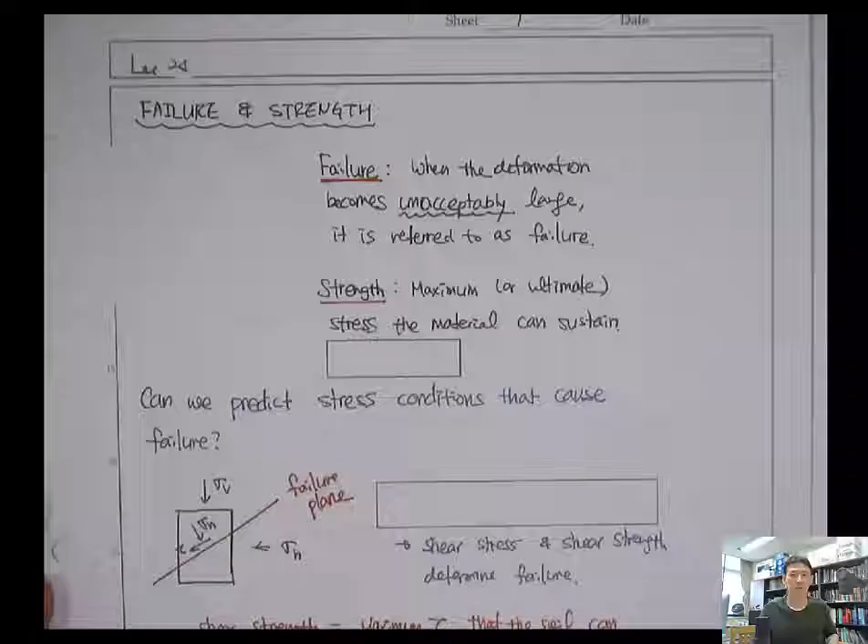So this is lecture 24. In this lecture, we're gonna talk about failure and strength, and in the later part we will talk about the stresses in the material.

So then, what is failure? What would be the failure when we consider it? Failure is a very subjective concept.

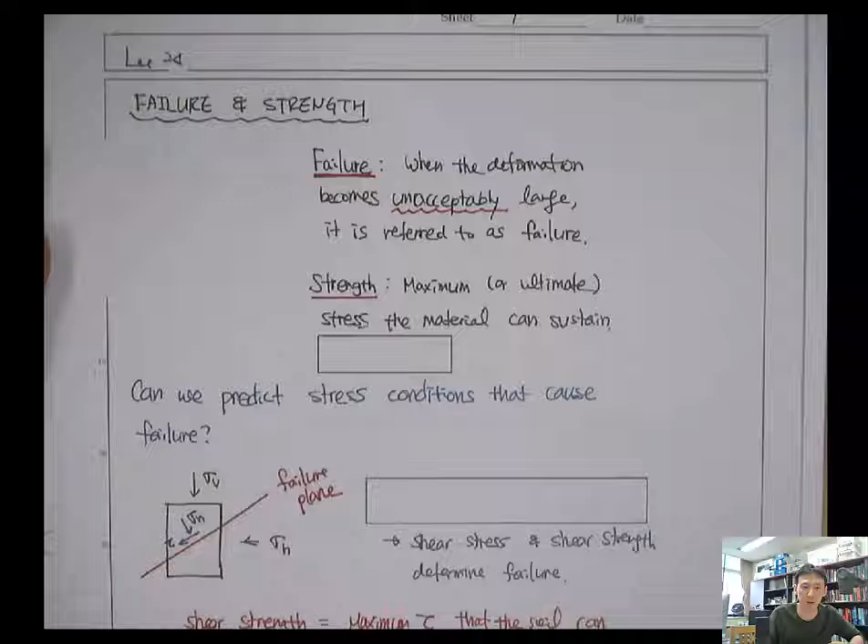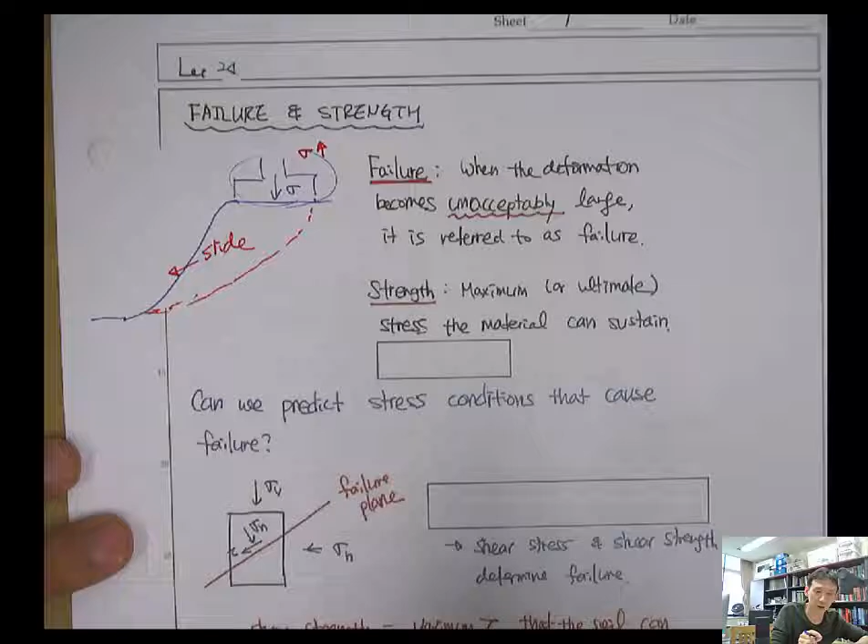Let's say that we have some kind of a slope like this, and we are building a structure with a foundation like this, and it applies the stress. As we increase the stress, it will deform a little bit by a little bit, and then eventually it's gonna slide. When the sigma is very low, the movement of this foundation will be very slow and very small. So if this structure is built in the middle of nowhere, like in a mountainous area where nobody is living, and if the slope failed, it wouldn't cause any damage to society. So then we can accept large deformation. Can we call it a failure?

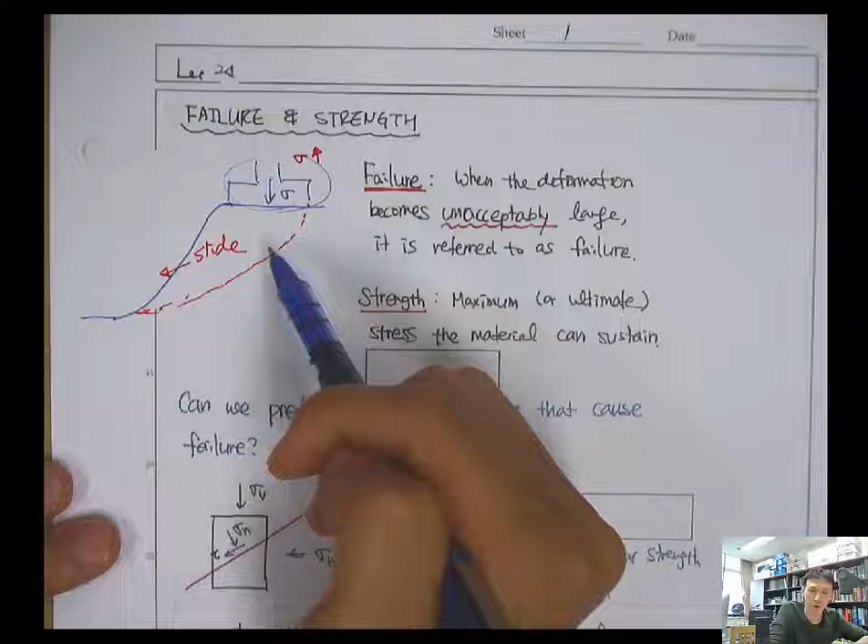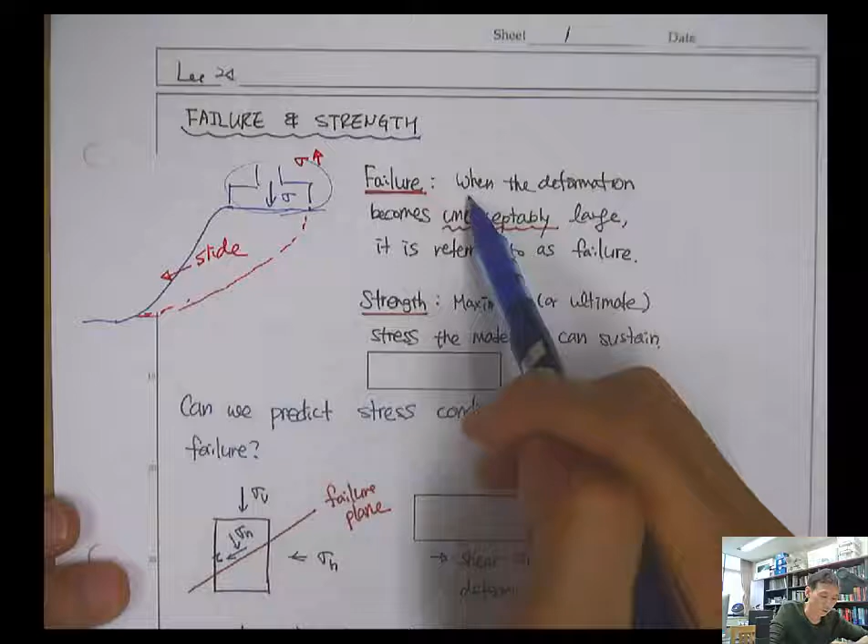But on the other hand, if this foundation supports a nuclear reactor, and if we have deformation of the soil mass or ground by maybe 0.1 millimeter, 100 micrometers, so the foundation has moved by 100 micrometers, and if it affects the functionality of the nuclear silo or reactor, then we can call it the failure. So when the deformation becomes unacceptably large, we consider it as the failure.

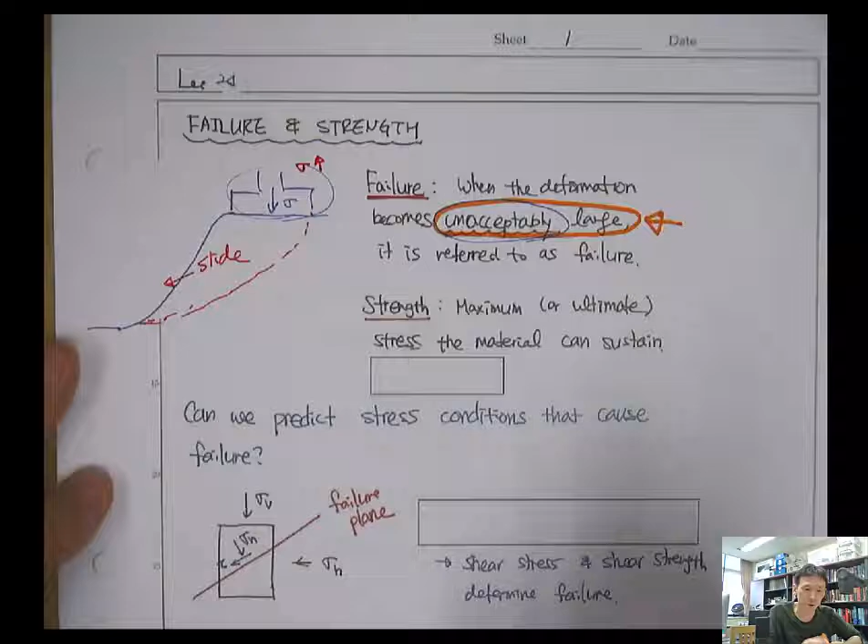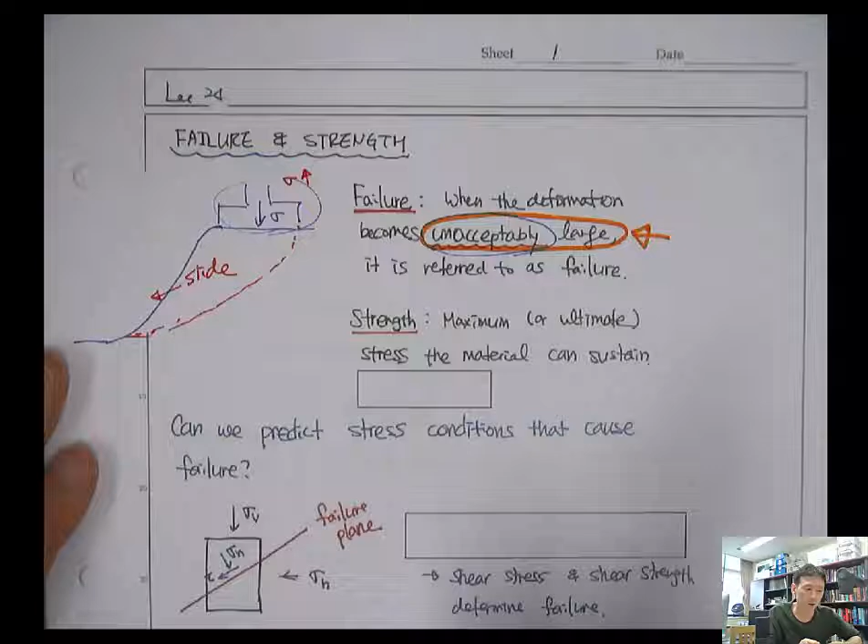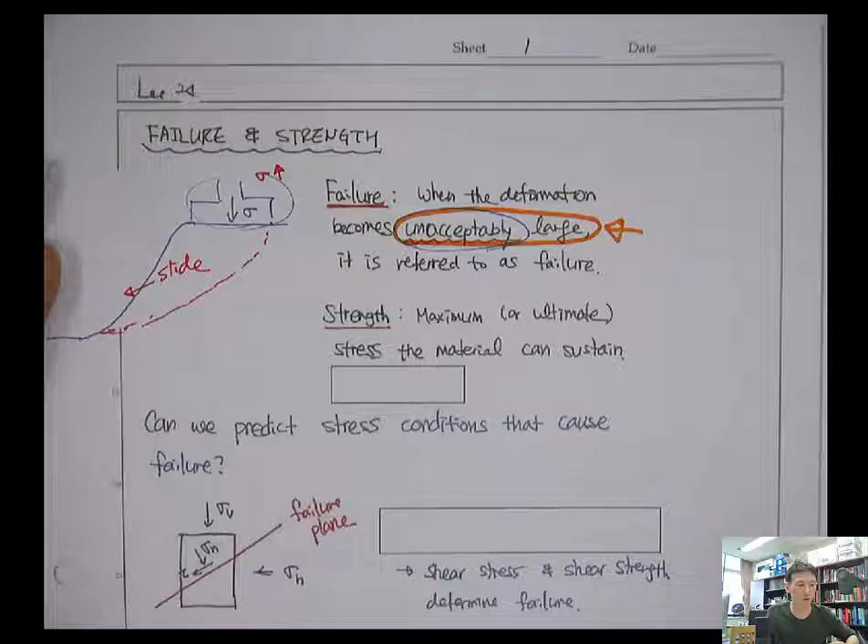This acceptance of deformation can differ from structure to structure. If it's a bridge, you may allow 10 centimeters of deformation, as long as the vehicle can still pass. If it's a very sensitive structure, like a nuclear silo or some factory machine with semiconductor fabrication, then even 1 millimeter of deformation can damage the functionality of the machine. So the allowable deformation depends on the structure type.

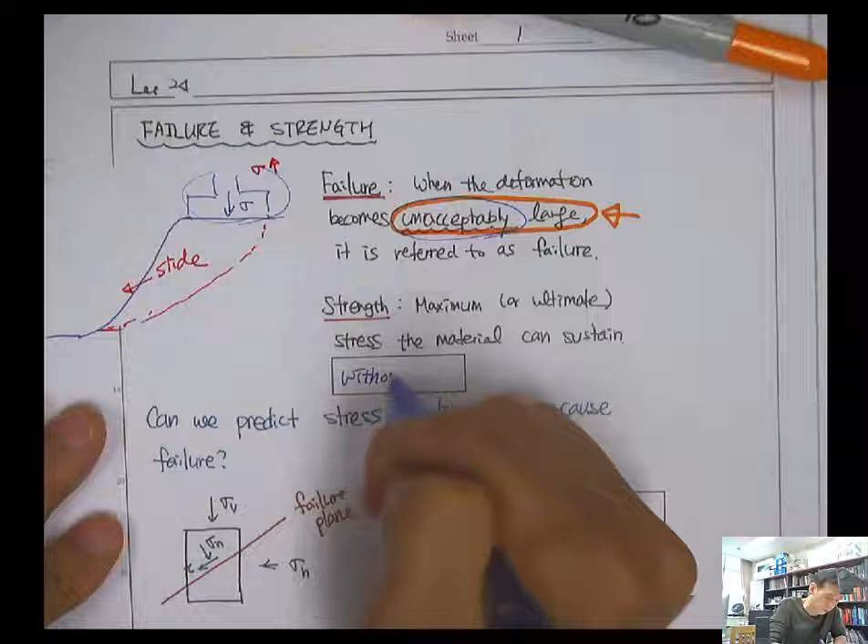So then, what is the strength? Strength is the maximum or ultimate stress that the material can sustain without failure. This is also a subjective term - if you only allow very minute deformation, then the strength can be estimated very low. If you allow large deformation, then the strength can be large.

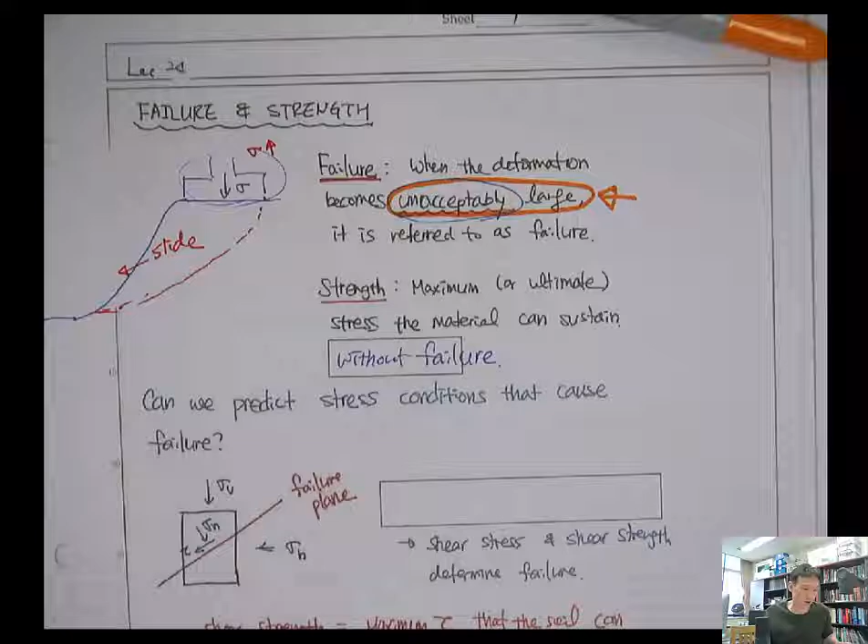If you think about rubber, what is the strength of the rubber? When it can deform maybe 1 millimeter, then the strength it can sustain will be very small. But if we have a rubber band that can hold the force without failure even though it stretches 1 meter, then the strength will be large.

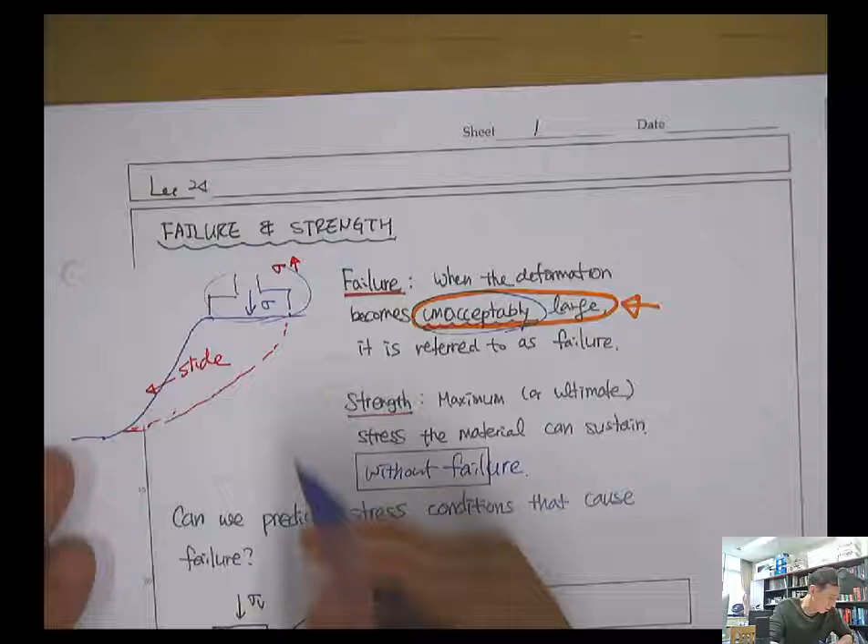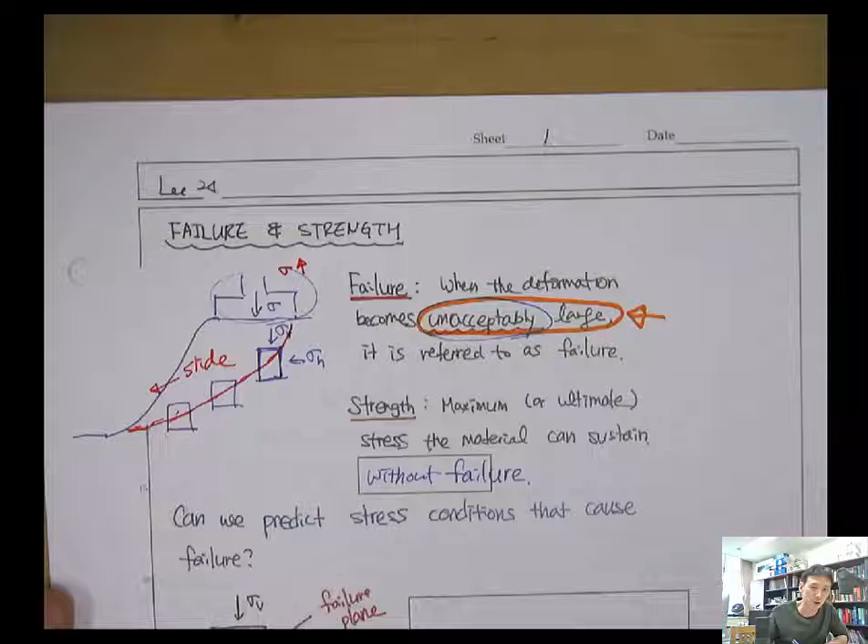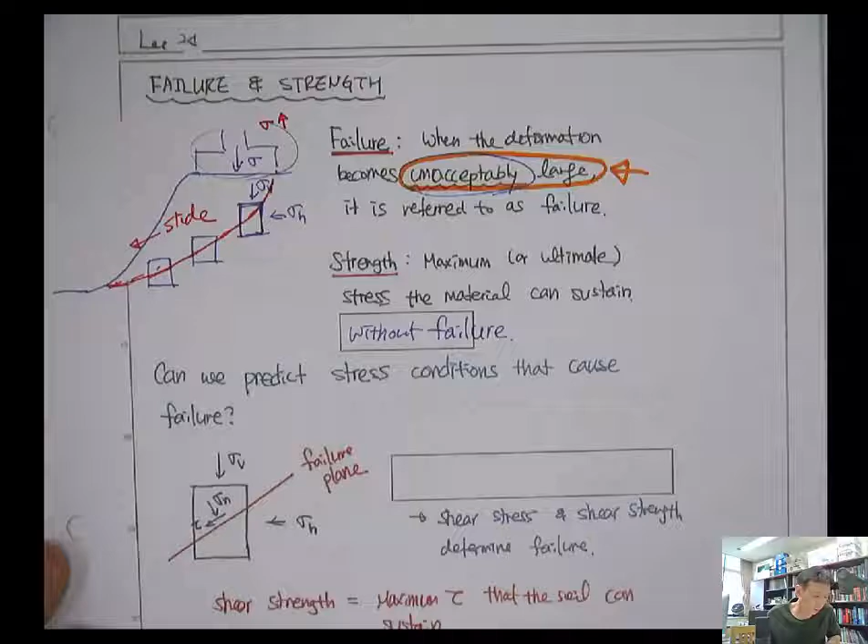So then can we predict this? Back to this slope and failure - when you slide along this failure envelope, and you look at this soil mass, the soil has sheared. It failed by shear. Here you have vertical stress and horizontal stress, and this will determine the strength of the soil and whether it can resist or sustain the applied load, the applied stress.

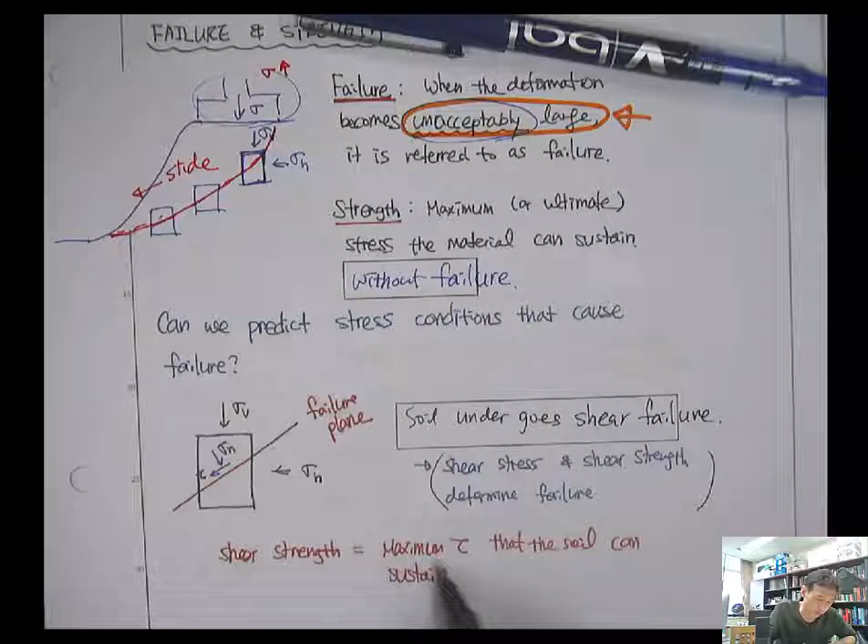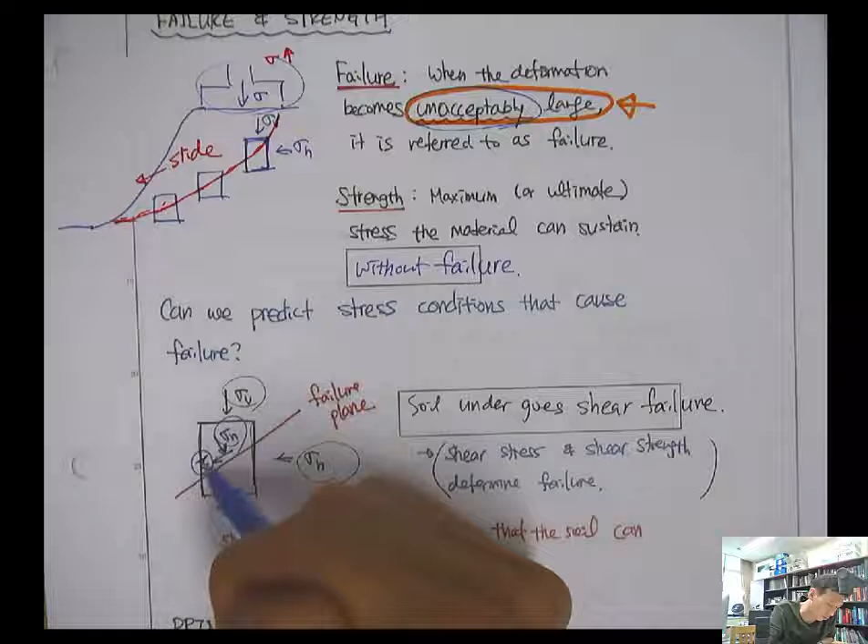As you can see from this example, soil undergoes shear failure in most cases. So shear stress and shear strength determine the failure, and shear strength is the maximum shear stress that the soil can sustain without failure. When you look at this soil mass, you have a vertical stress and a horizontal stress, and this is the failure plane. On that failure plane, you have a normal stress that's compressing, and you have a shear stress tau that's shearing the material, or causing sliding between the grains.

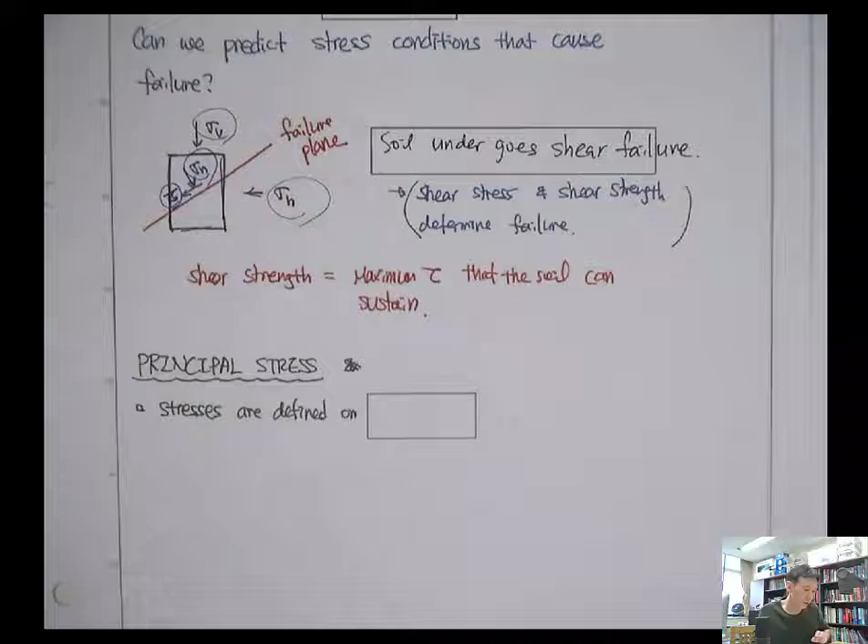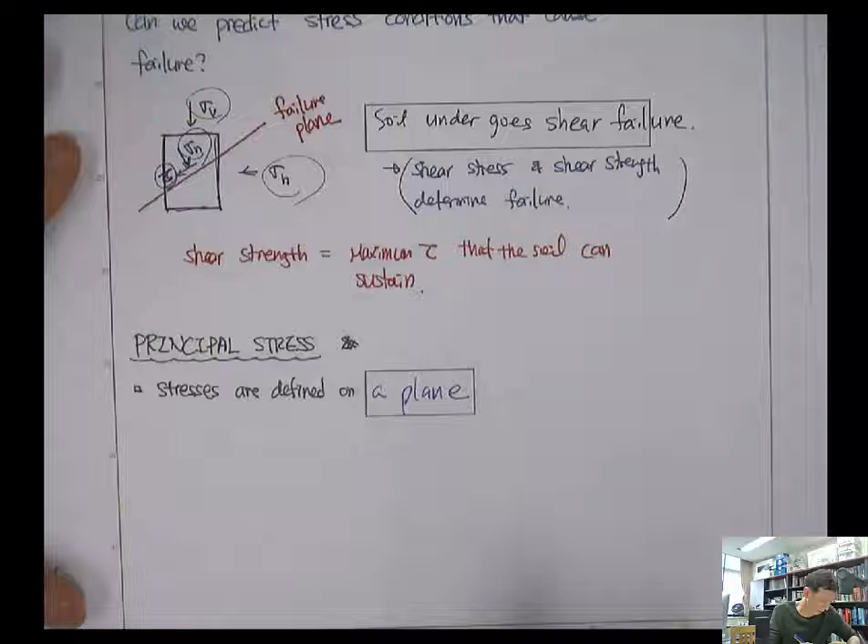Okay, then we'll talk about principal stress. If you have taken a materials mechanics class or solid mechanics, you'll be familiar with this principal stress and principal plane. Stresses are defined on a plane, because force has a direction and a magnitude - that's a vector. So stresses also have direction and magnitude, so they act on a plane. This is different from pressure - pressure doesn't have direction, it's a scalar. But stress is a vector, or a tensor in 3D.

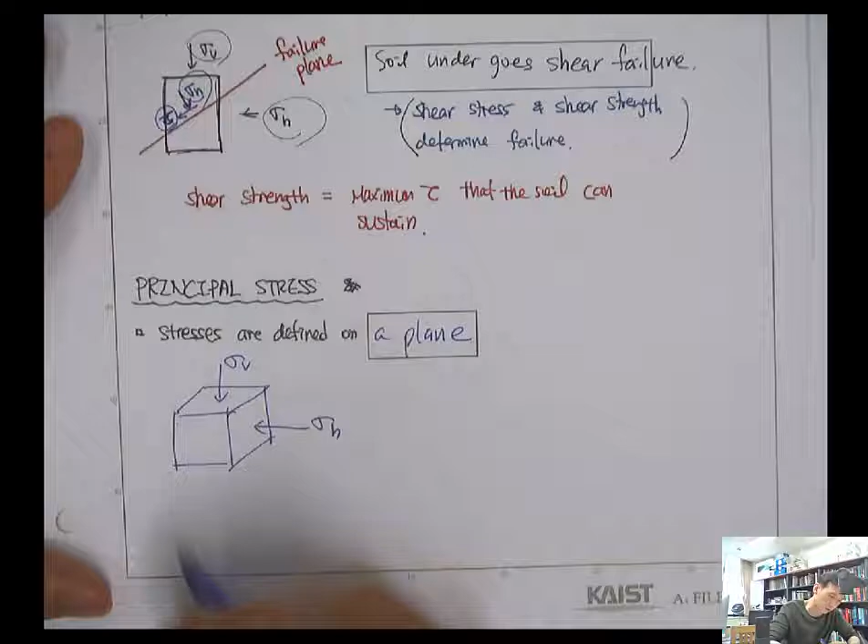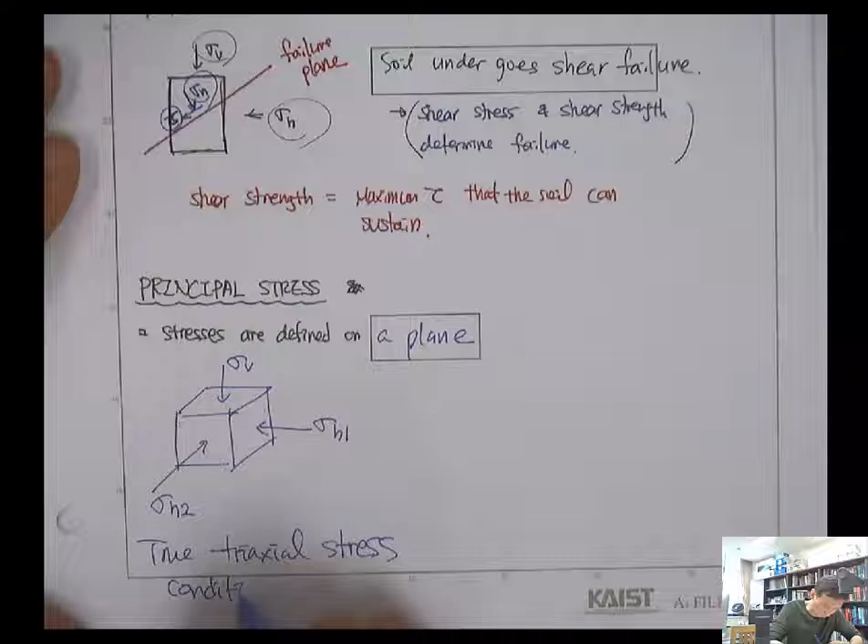So then, at a certain depth, when you think about the soil mass as a cube, you will have a vertical stress and a horizontal stress and another horizontal stress - H1 and H2. This is called the true triaxial stress condition. In most cases, sigma H1 is almost the same as sigma H2, so we can simplify this into a cylindrical soil mass with sigma V and a radial stress, sigma H or sigma R.

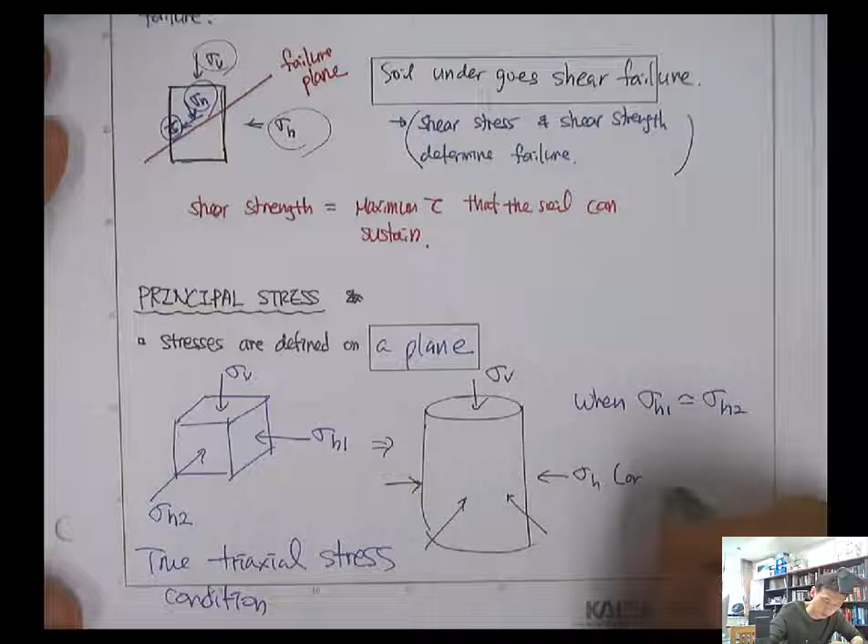So this is kind of a simplified condition from the true triaxial stress condition, when sigma 2 is similar to sigma 3, and sigma H1 is similar to sigma H2.

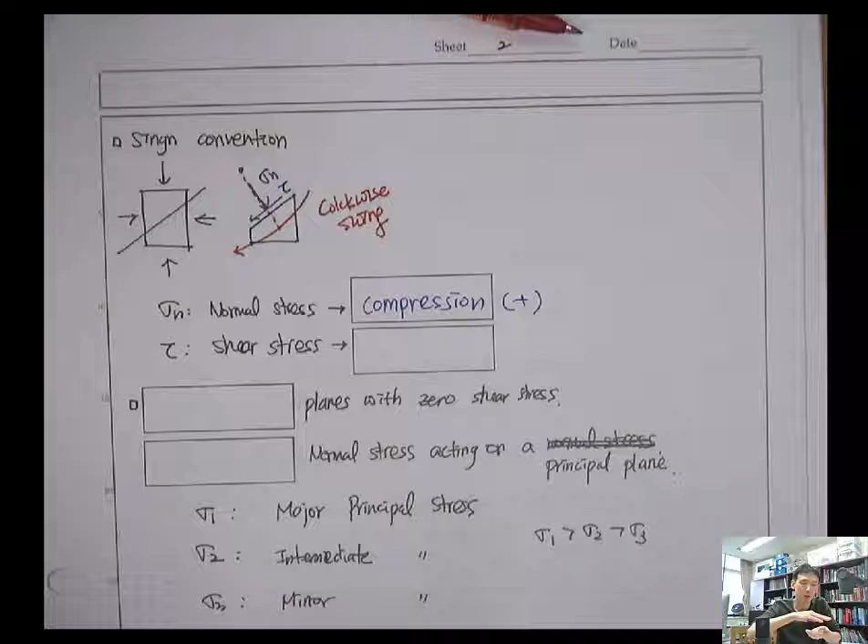Before we move forward, we have to have a certain rule for the sign convention. In geotechnical engineering, the normal stress is positive when it's compression. So it's not about the direction, whether it's aligned with the gravitational direction or not. It's about whether it's compression, then it's positive, and if it's tension, then it's negative.

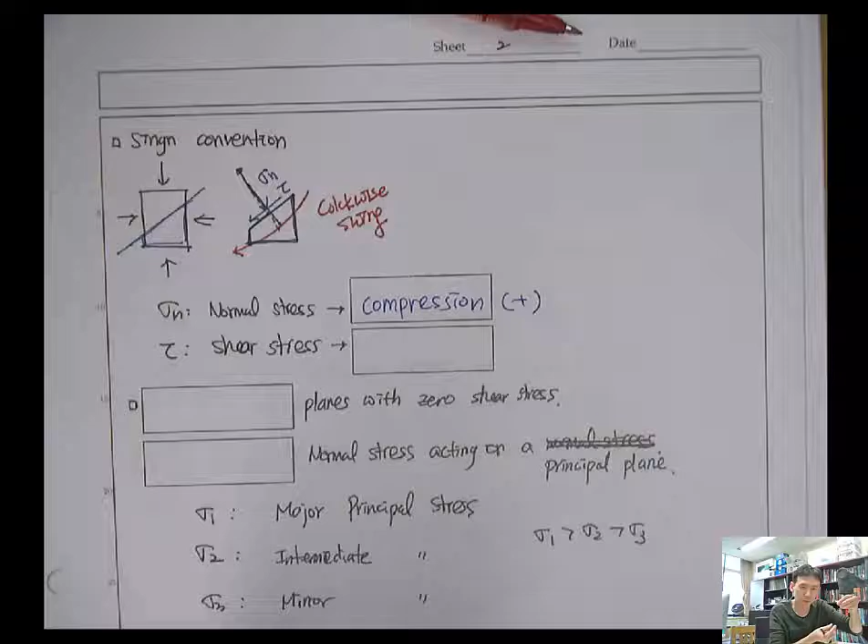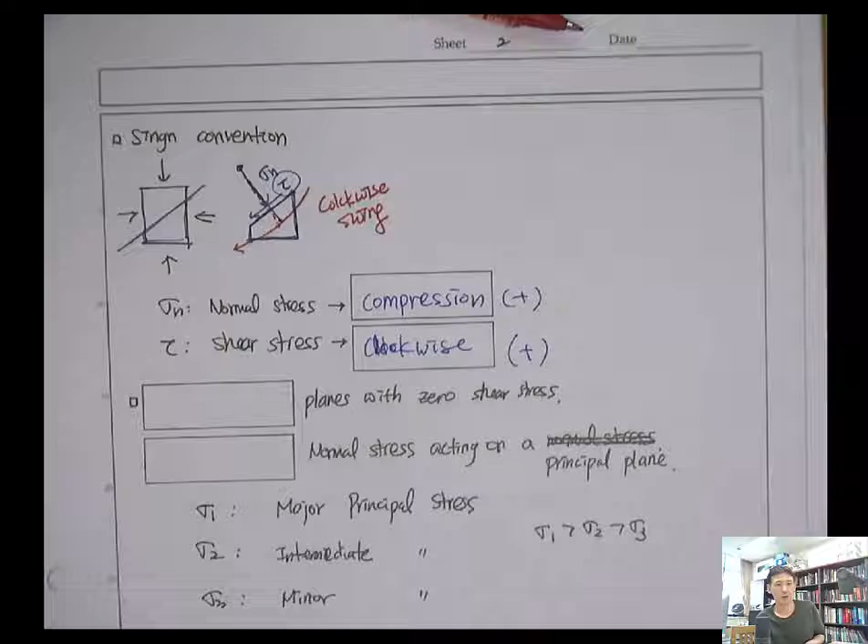And the shear stress — think about this mass, which is just the part of the soil mass that's cut off. Then you have a string that's holding this object, so the object is in a kind of pendulum stage, and it can go back and forth by the force. If the shear stress tau swings in the clockwise direction, then shear stress is positive. So if the shear stress causes the clockwise swing in this pendulum, then it's positive. Counterclockwise is negative.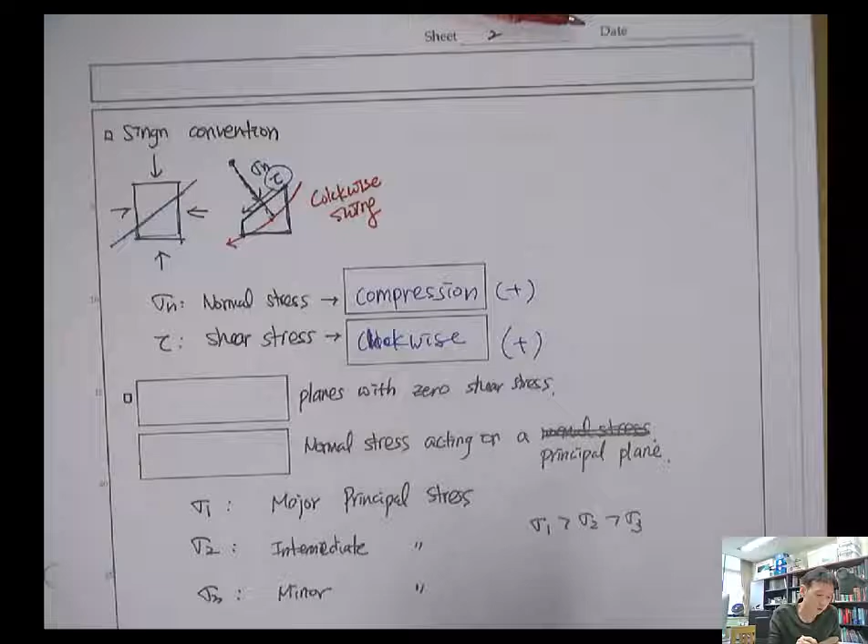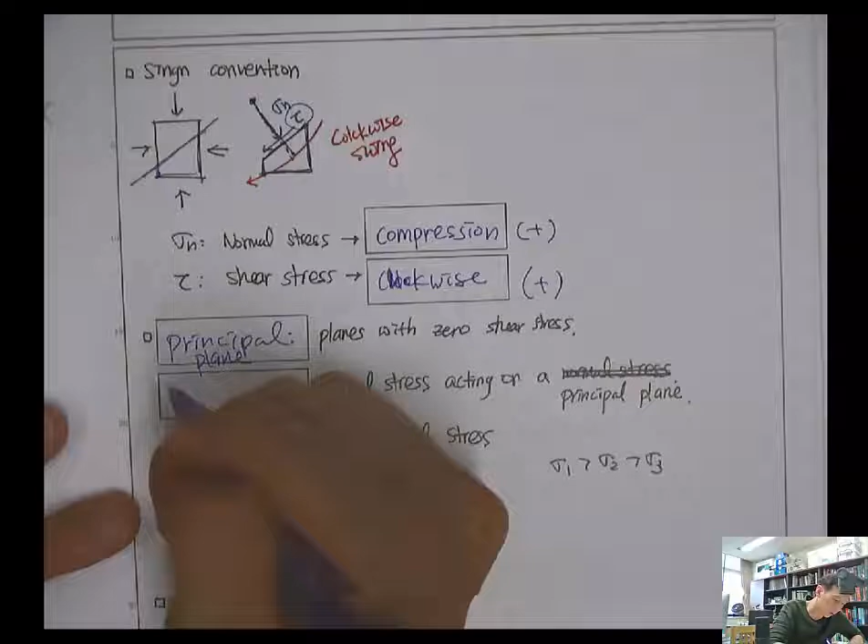Principal planes. A principal plane is defined as a plane with zero shear stress. And principal stress is defined as the normal stress acting on a principal plane.

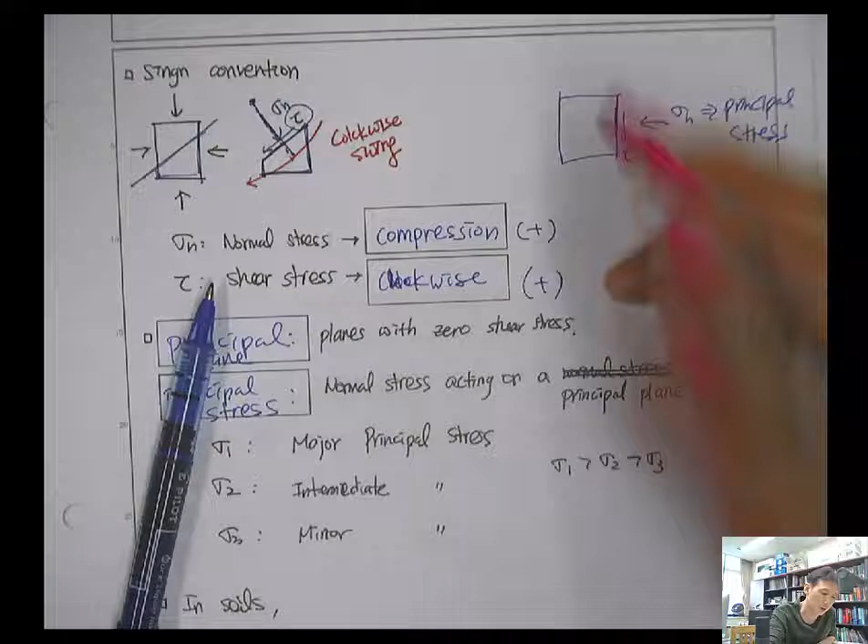So if the shear stress is zero here, tau is zero, then the normal stress here will be the principal stress, and the principal plane will be this one.

In the 3D world, we have three principal stresses: sigma 1, sigma 2, and sigma 3. They are orthogonal to each other. The biggest one is called the major principal stress, the smallest one is called the minor principal stress, and the one in between is the intermediate principal stress.

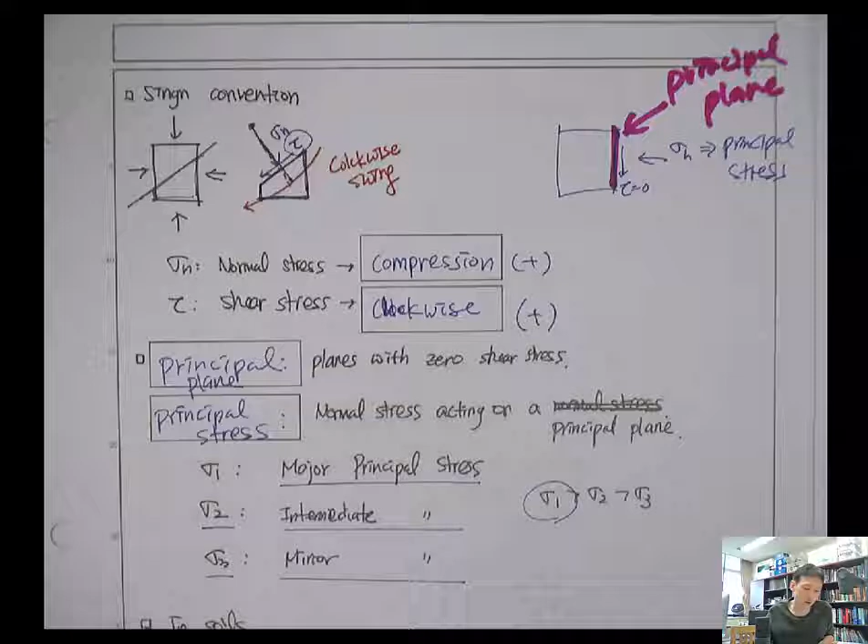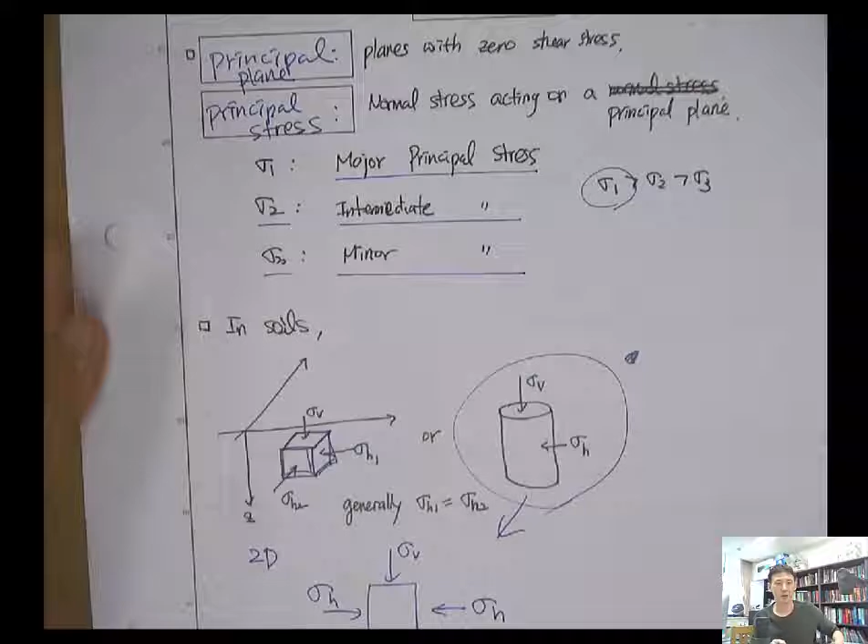So in soil, when you have a soil cube like this, with sigma V, sigma H1 and sigma H2, and sigma H1 is generally the same as sigma H2, it can look like this. In the 2D world, we can simplify this into a square with sigma V and sigma H. If there's no shear stress on this horizontal plane, then this plane will be a principal plane. And if there's no shear stress on this vertical plane, then this vertical plane will be a principal plane.

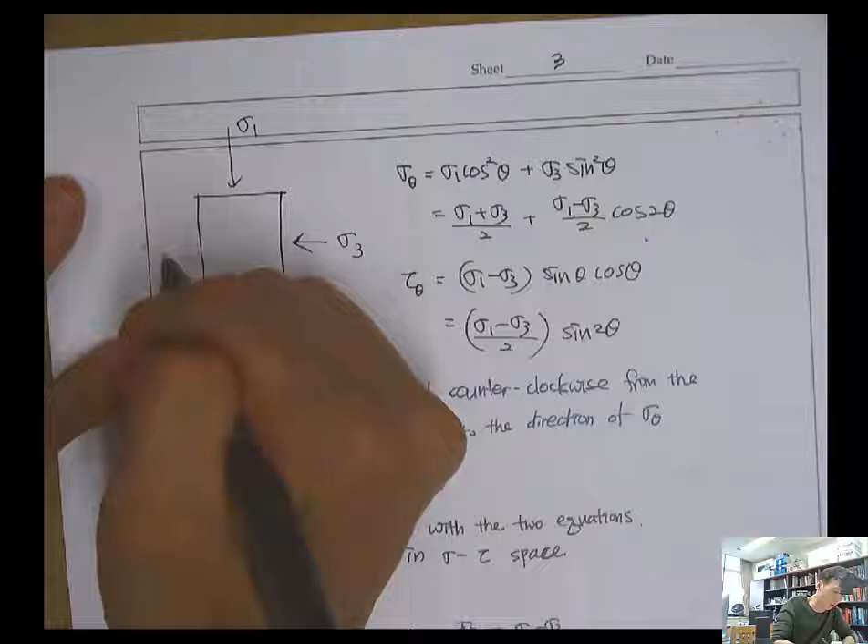In the next page, let's think about one soil mass, where the major principal stress sigma 1 is applied on the horizontal plane, and sigma 3, the minor principal stress, is applied on a vertical plane. Here we are looking at this plane — we are cutting the object with this line, and there will be a normal stress acting on this plane of interest, and there will be shear stress acting on this plane.

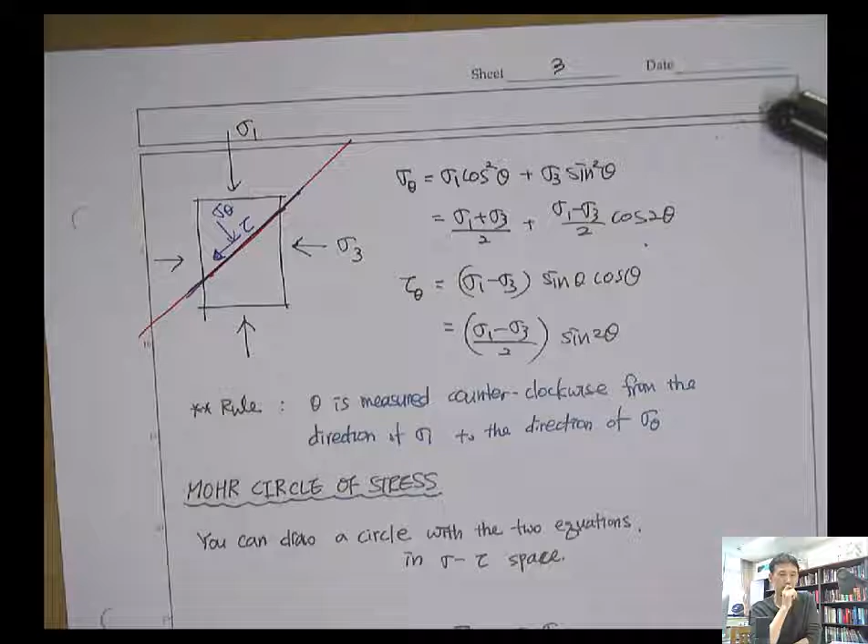So sigma theta and tau theta can be obtained using this equation. Sigma theta will be sigma 1 times cosine squared theta plus sigma 3 times sine squared theta. And tau theta will be sigma 1 minus sigma 3, times sine theta times cosine theta. Here theta is measured counterclockwise from the direction of sigma 1 to the direction of sigma theta.

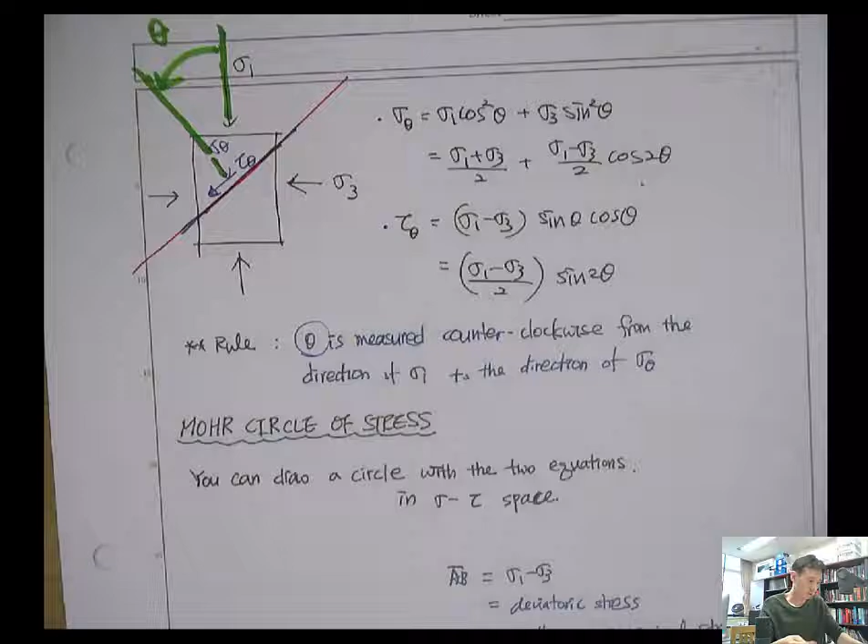So theta is measured counterclockwise from the direction of sigma 1. This is the direction of sigma 1, and sigma theta direction is this — because this is the one. Then counterclockwise is this direction, this will be theta. Fortunately here theta is the same as this here, but in some cases it's not the same.

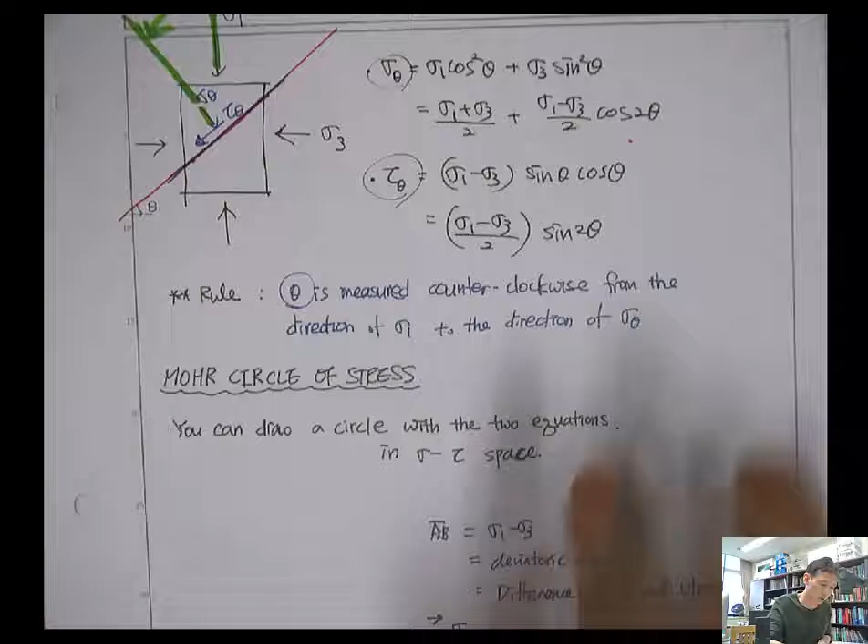Because we have these two equations to get sigma theta, the normal stress acting on the plane of interest, and tau theta, the shear stress, using these two equations we can draw a circle in a sigma and tau space. The x-axis is sigma and the y-axis is tau.

Then with sigma 3 and sigma 1, you can draw a circle, and here's the center. Because at the point where the major principal stress sigma 1 is applied, shear stress will be zero — that's the definition of the major principal stress. Minor principal stress, sigma 3, also here. So principal stresses will be located on the x-axis where the y value is 0.

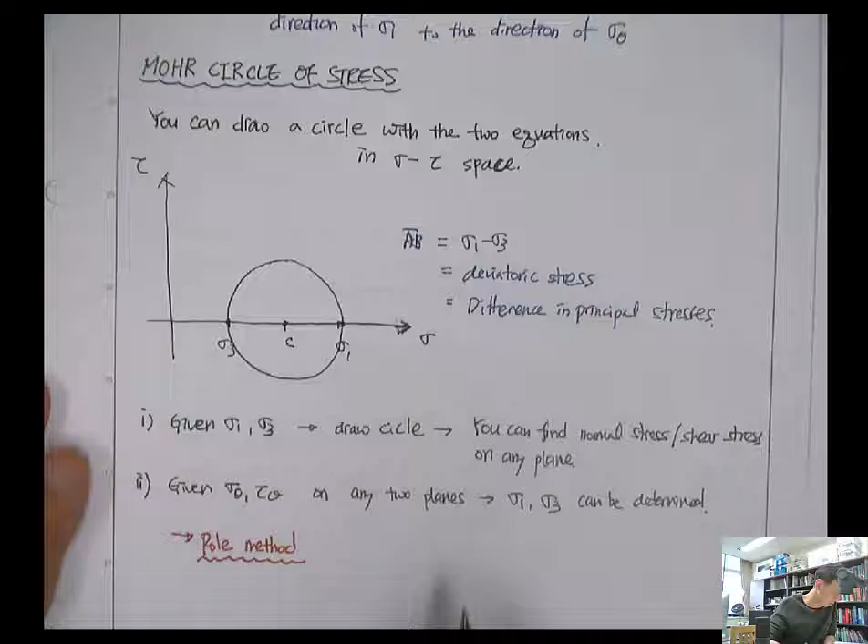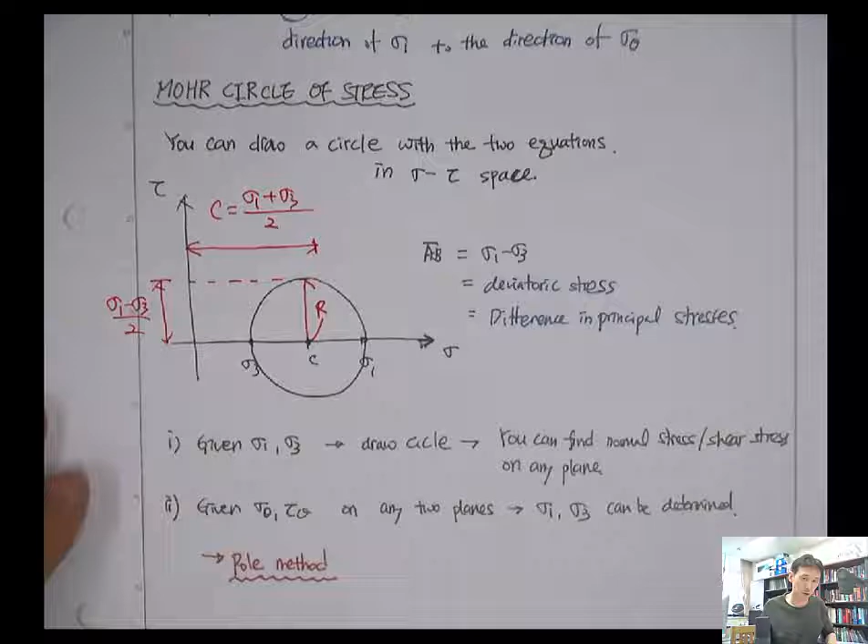So the location of C, the center of the circle, is sigma 1 plus sigma 3 over 2. And the radius, which is this one, will be sigma 1 minus sigma 3 over 2 — that's the radius of the circle. A and B, this is point A, and this is point B. The length of the distance between A and B is sigma 1 minus sigma 3, and that's called the deviatoric stress, or difference in principal stresses.

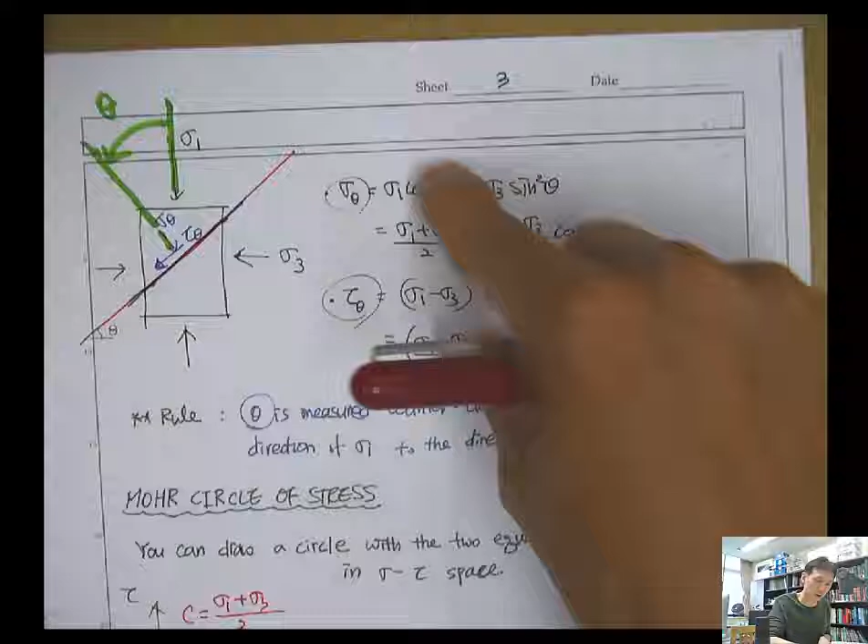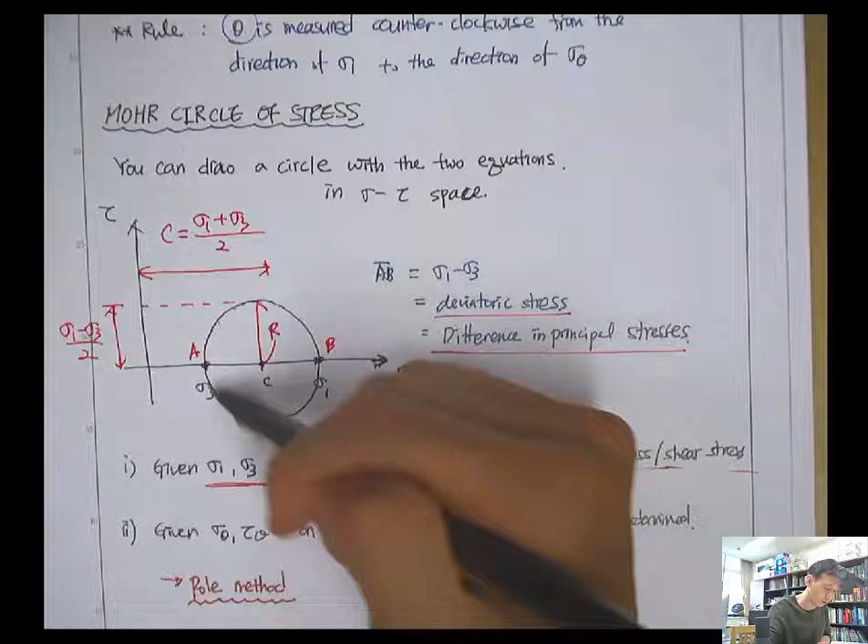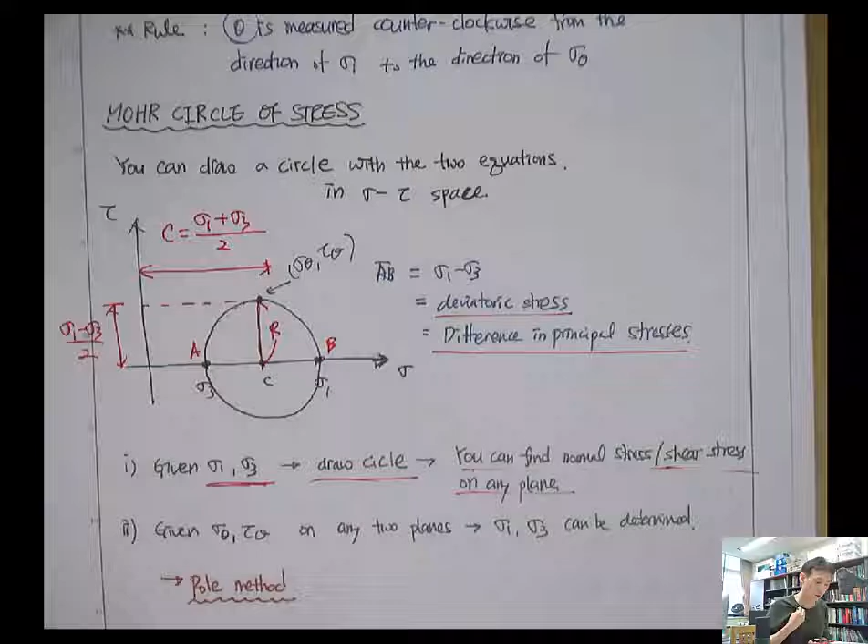Using these two equations, or using this Mohr circle, you can draw a circle for given sigma 1 and sigma 3, and find the normal stress and shear stress on any plane. That means a point along this circle represents the stress state on a certain plane. For example, here it will have a normal stress of this much, and sigma theta and tau theta will represent the normal stress and shear stress on a certain plane. And for a given sigma theta and tau theta on any two planes, sigma 1 and sigma 3, the major and minor principal stresses, can also be determined using the pole method.

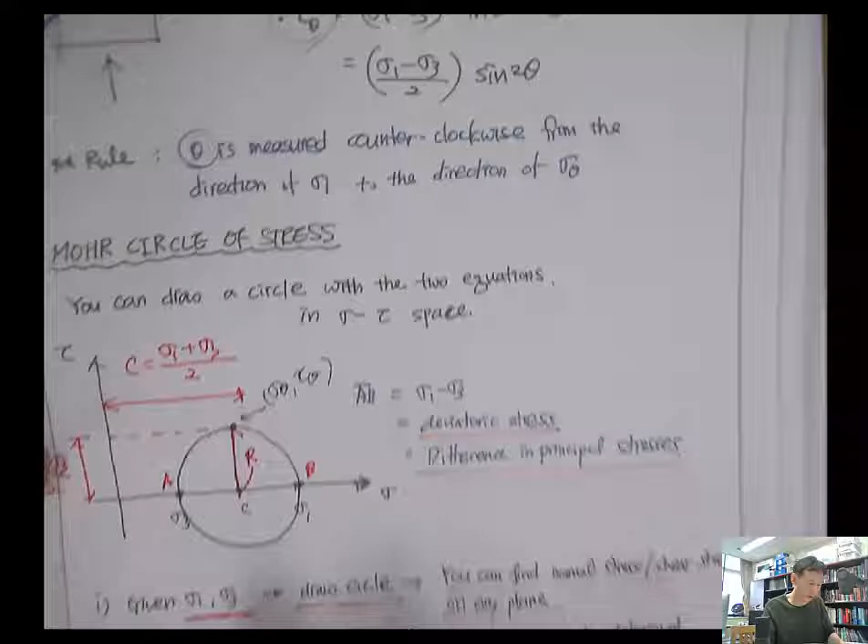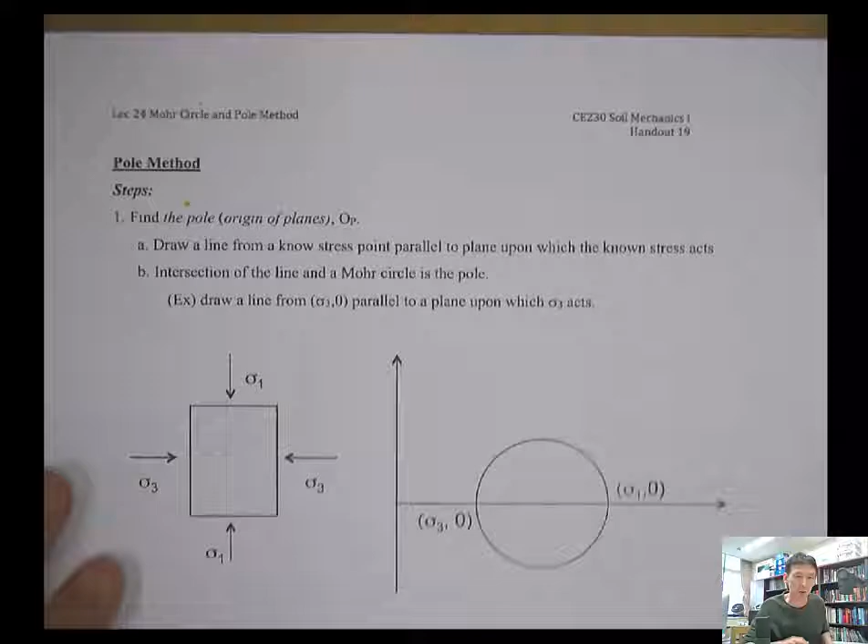To find out more details and the mechanism of the Mohr circle, let's look at the pole method here. This is a very convenient way to interpret the Mohr circle and find the stress state on the plane of interest, or any plane that you're interested in. Let's go one by one.

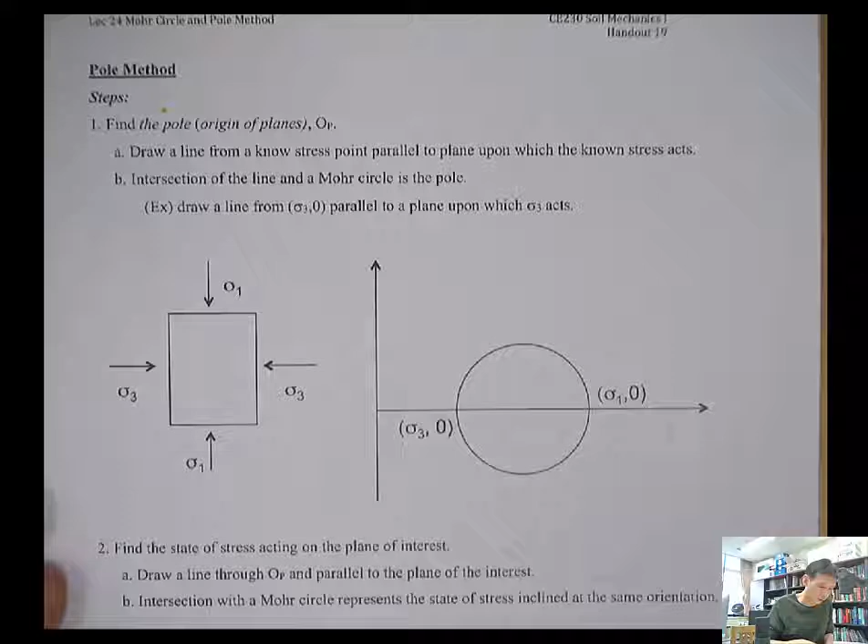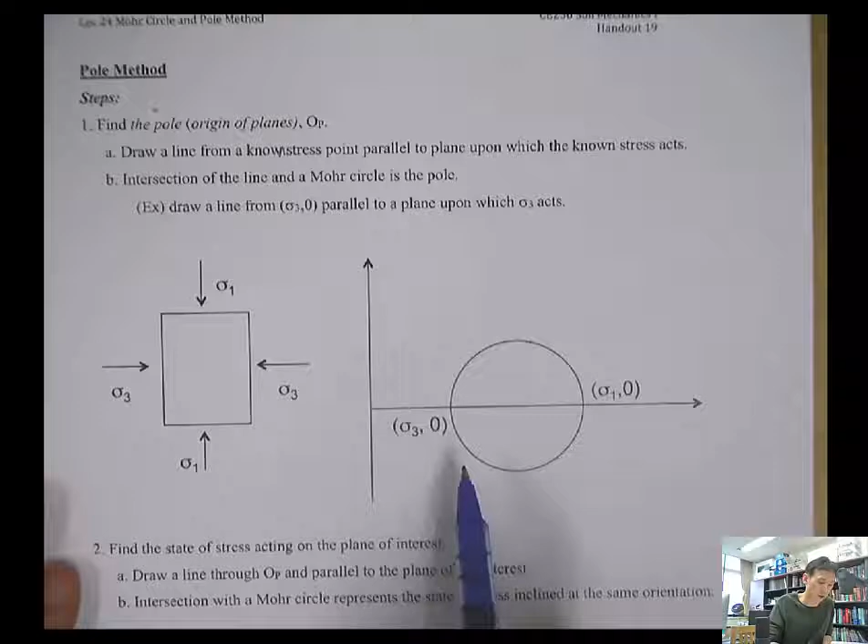These are the steps to find the stress state. Step 1 is to find the pole, also referred to as origin of planes, OP. To find the pole, draw a line from a known stress point parallel to the plane upon which the known stress acts. So this is the soil mass with the known stress condition. We know sigma 1 and sigma 3. Sigma 1 is applied vertically, and sigma 3 is applying horizontally on the vertical plane. Then we can draw the circle using sigma 1 and sigma 3, so the coordinates will be (sigma 1, 0) and (sigma 3, 0).

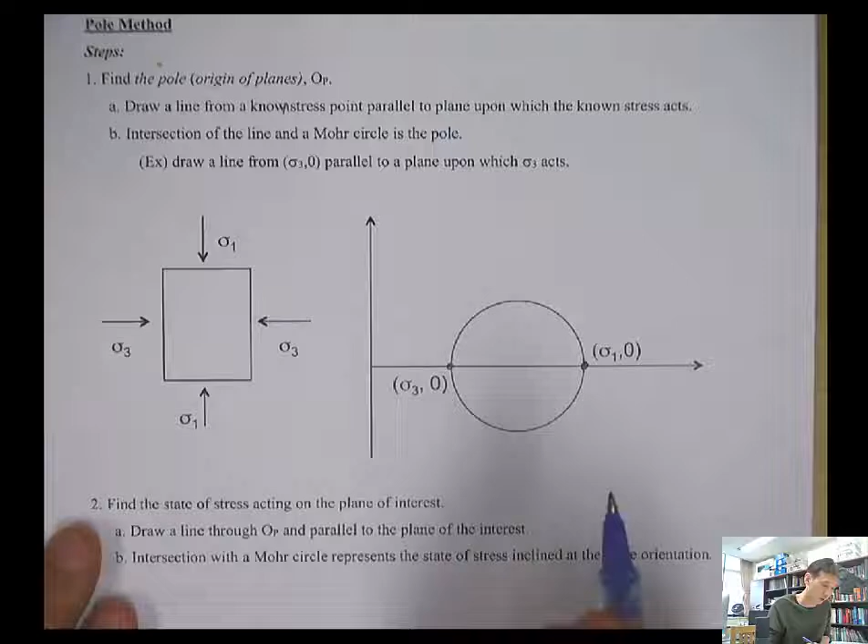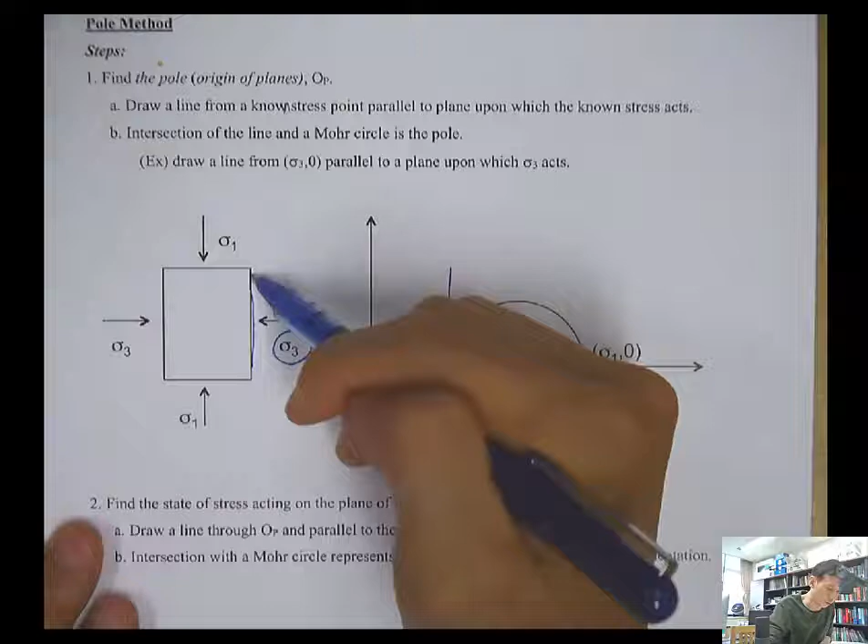Now let's find the pole. Sigma 3 is here, the minor principal stress, acting on the vertical plane. So if you draw the line parallel to this vertical plane, the intersection with the circle is the pole. So this will be the pole.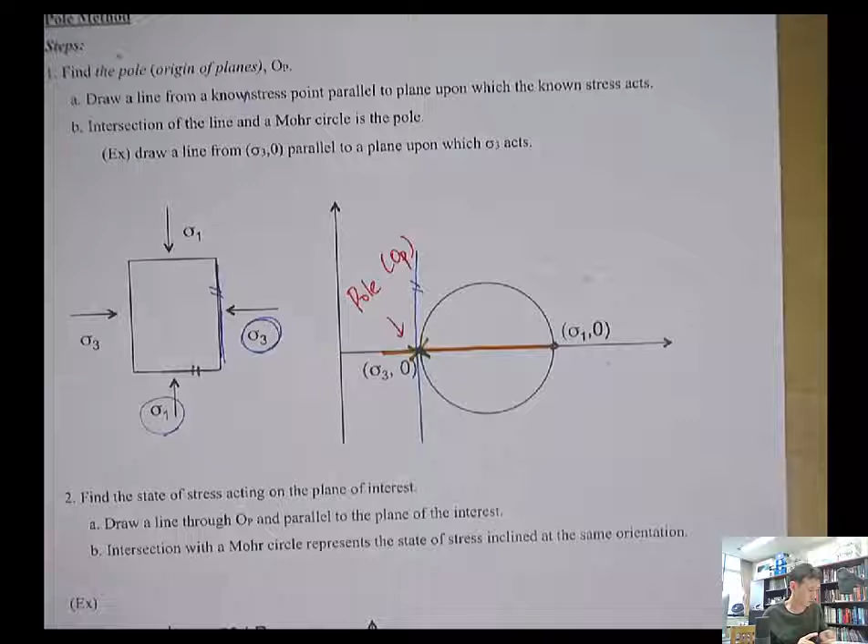The pole is a point on the circle. We can also find the pole from sigma 1. Sigma 1 is here, and it's acting on the horizontal plane. Let me use a different color. If we draw it horizontally, then this will be the pole.

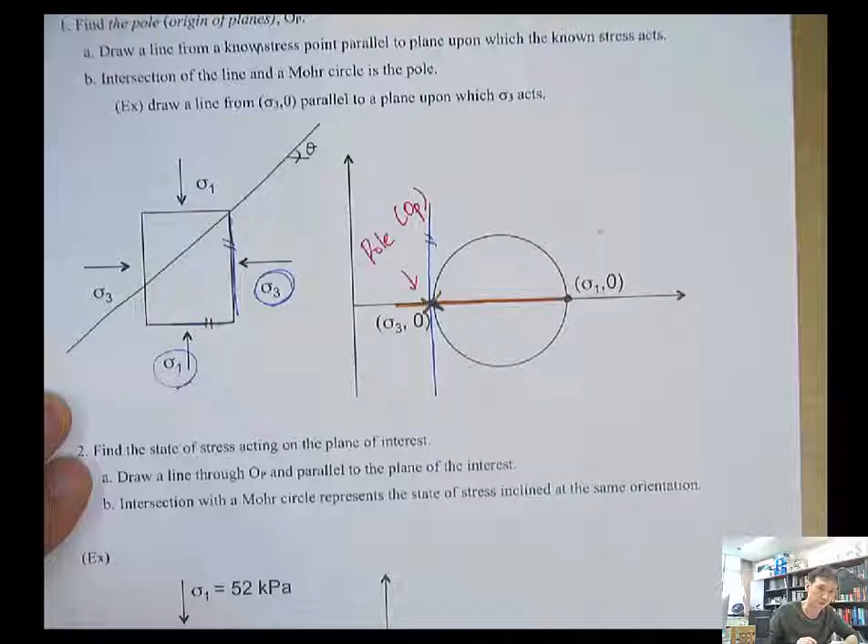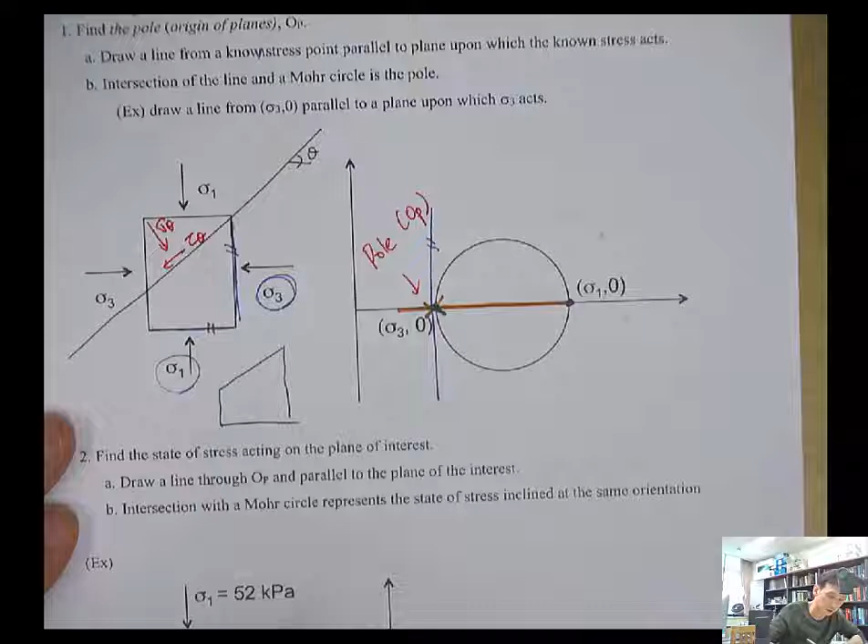Second, find the state of stress acting on the plane of interest. Let's assume we are interested in the stress on this plane. We want to find sigma theta and tau theta acting on this plane. If we plot it differently, we can take the bottom half only, and this is theta. We want to find sigma theta and tau theta, this one.

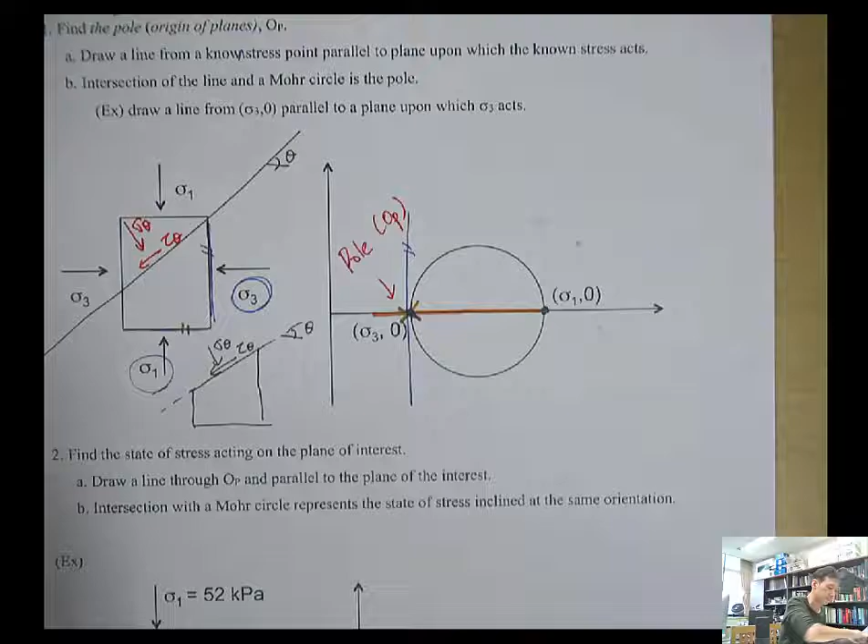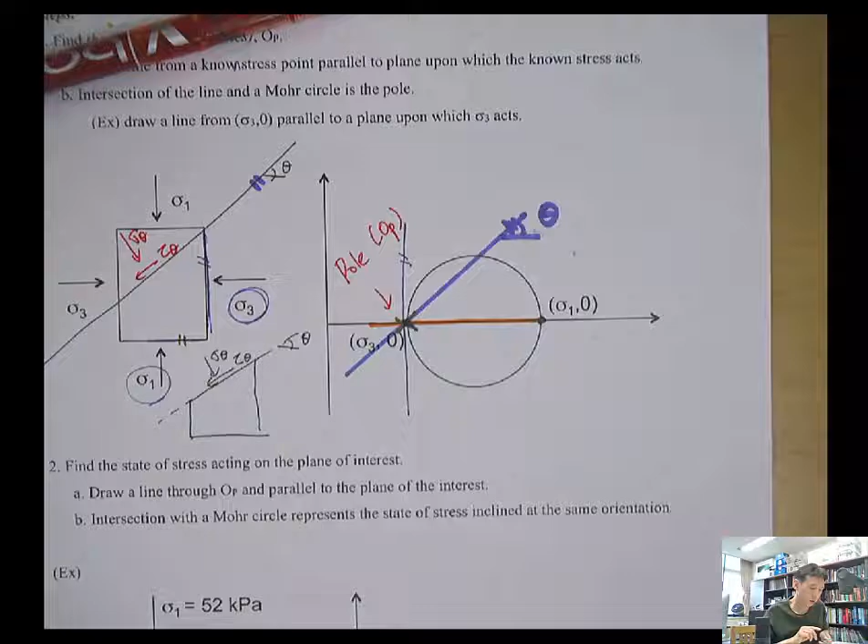Draw a line through the OP, parallel to the plane of interest. This is the plane of interest, and parallel to it you can draw a line, and this will have the angle theta. The intersection with the Mohr circle represents the state of stress inclined at the same orientation. So here, the intersection with the Mohr circle, sigma theta comma tau theta, will represent the stress state on this inclined plane of interest.

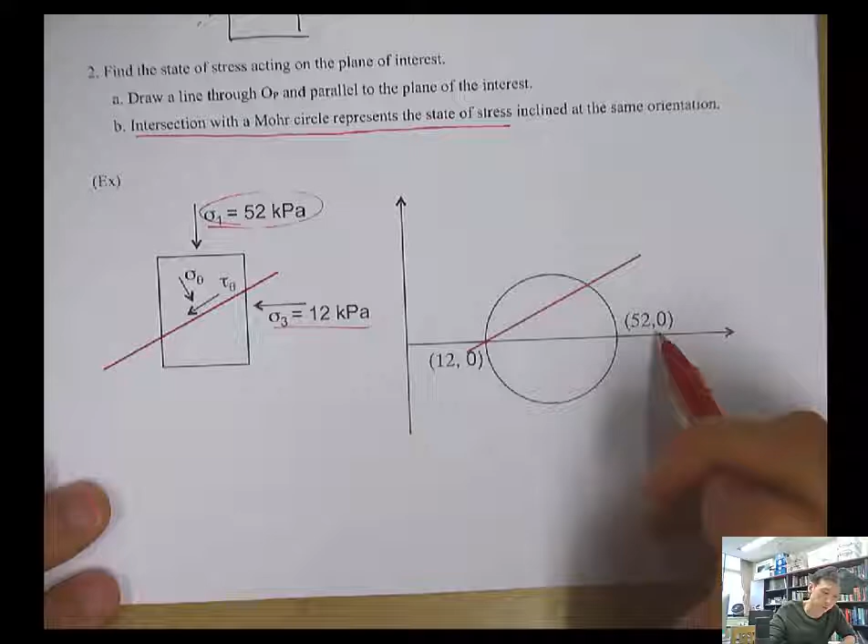Let's look at this example here. Sigma 1 is given as 52 kilopascal and sigma 3 is given as 12 kilopascal. Then you can draw a circle: (52, 0) and (12, 0). We want to find sigma theta and tau theta on this plane of interest, shown in the red line.

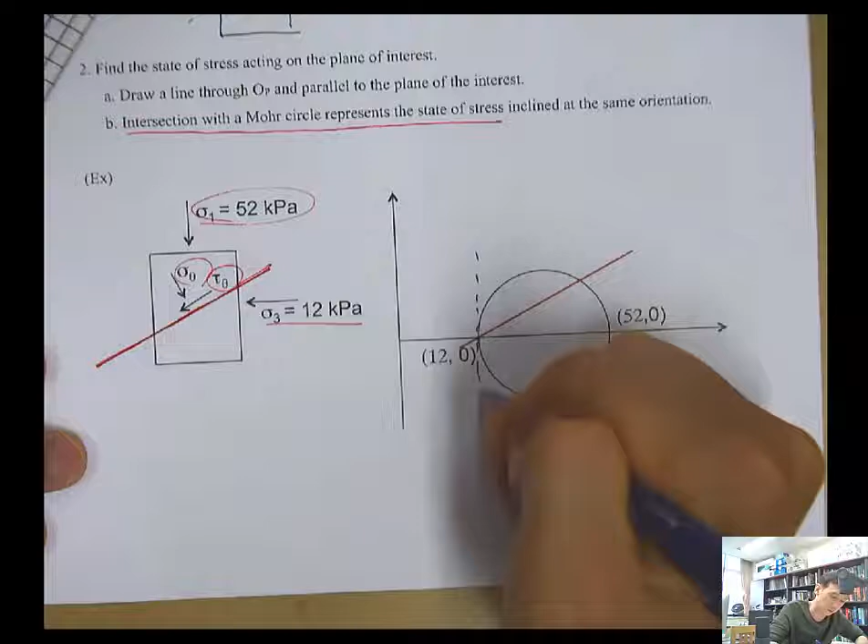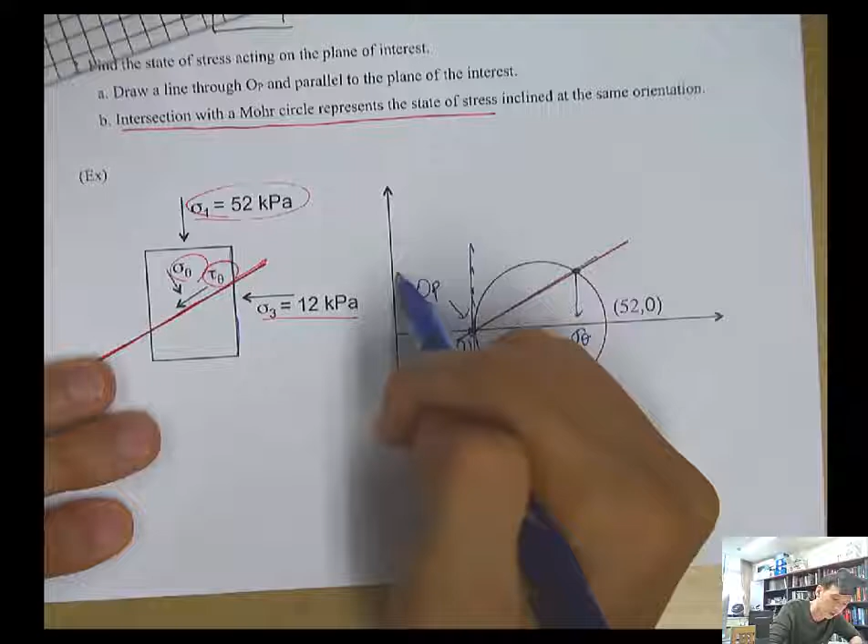First we have to find the pole. The pole will be here, because if you draw the line parallel to the plane that sigma 3 is acting on, the intersection with the circle gives the pole. So this is the OP, the pole. Then you can draw the line parallel to the plane of interest, it's already drawn here. This intersection will give you sigma theta and tau theta.

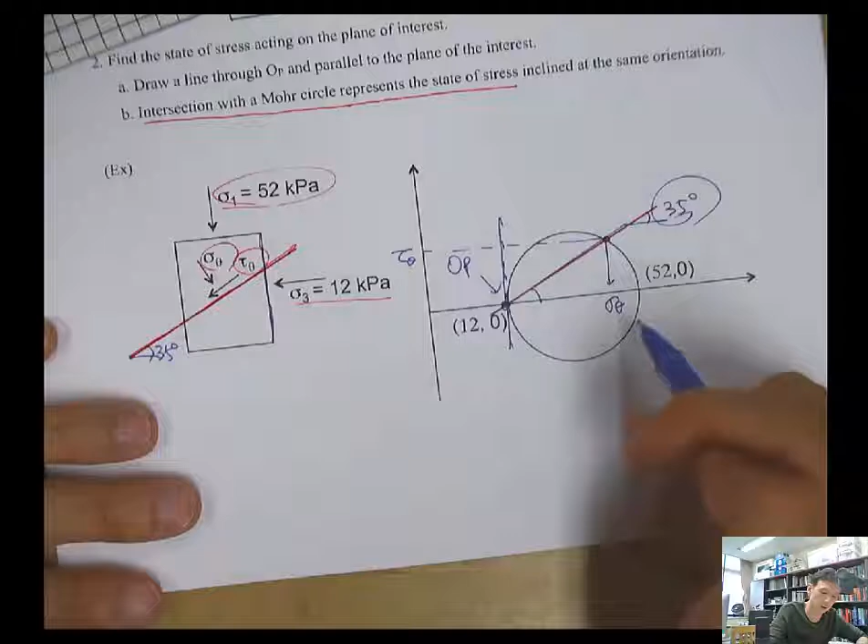Here it's about 35 degrees. Because you know this angle, you can find sigma theta and tau theta using the trigonometric relation. You know the center, the radius, and the angles. If you compute it, you get 39 kilopascal as the normal stress, and the shear stress will be 18.6 kilopascal.

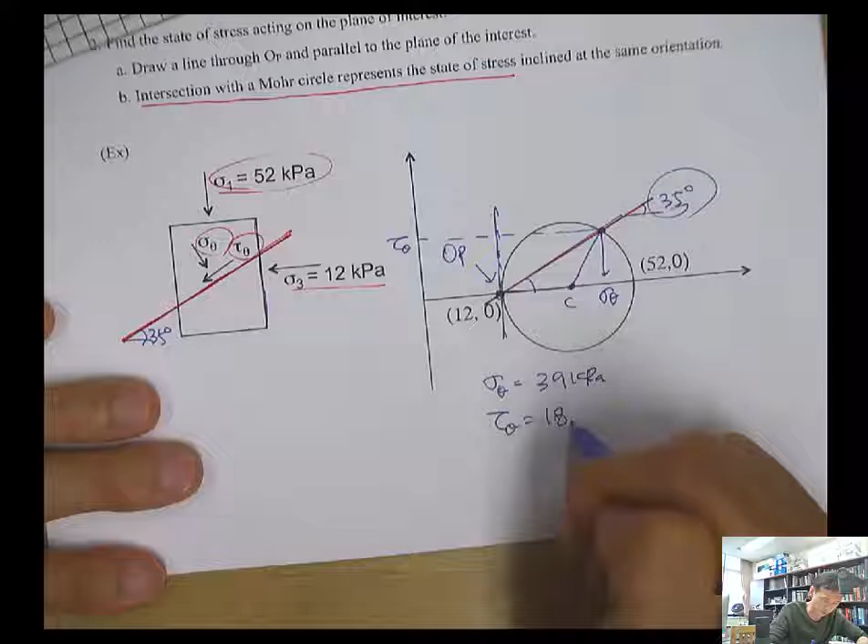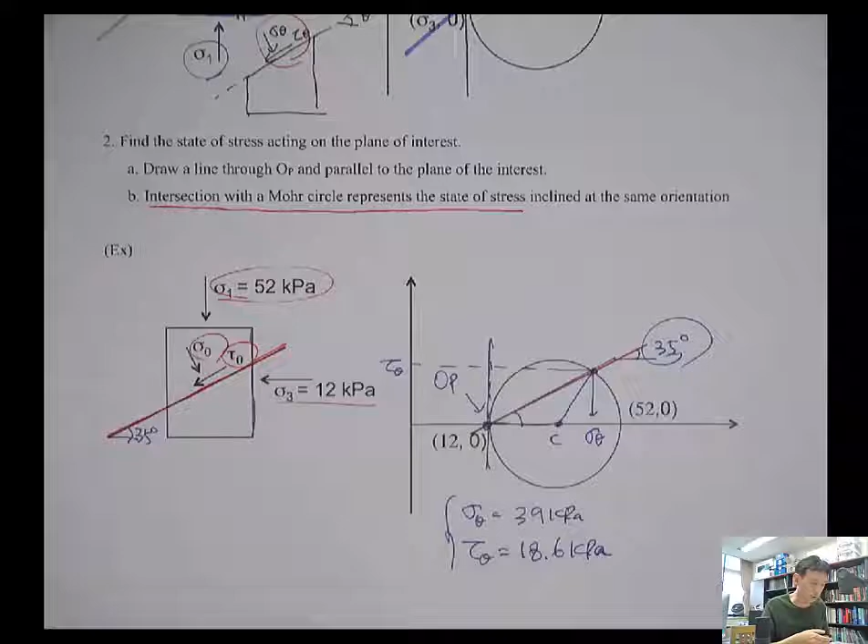Okay, that's it. In the classroom, in the class, we're going to have more examples to explore this pole method together. Thank you.